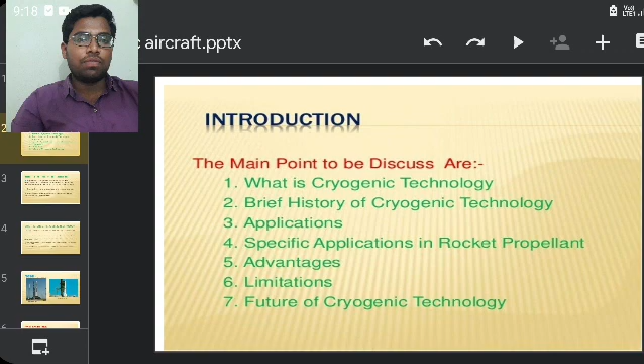What is cryogenic technology? In physics, cryogenics is the study of the production and behavior of materials at very low temperature, below minus 150 degrees and minus 238 degrees Fahrenheit or 123 Kelvin. The study of how to produce low temperatures. The study of what happens to materials when you have cooled them down.

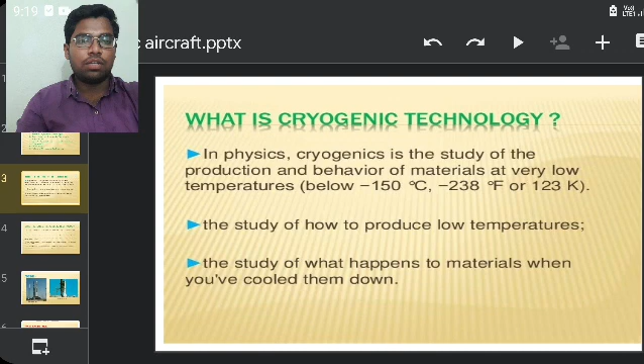Brief history of cryogenic technology. The field of cryogenics advanced during World War II when scientists found that metals frozen to low temperatures showed more resistance to wear. The United States was the first country to develop cryogenic rocket engines, with the RL-10 engine registering its first successful flight in 1963, and it is still used on the Atlas V rocket.

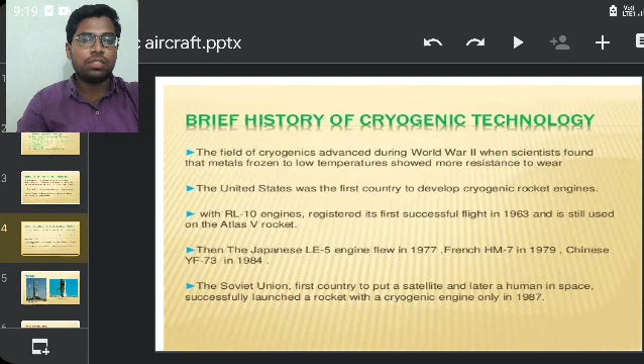Then the Japanese LE-5 engine flew in 1977, French HM-7 in 1979 and Chinese YF-73 in 1984. The Soviet Union, first country to put a satellite and later a human in space, successfully launched a rocket with a cryogenic engine only in 1987. Continued. These are some photos of rockets, Russian N1 on the right and American Atlas V on the left, which are used by cryogenic engines.

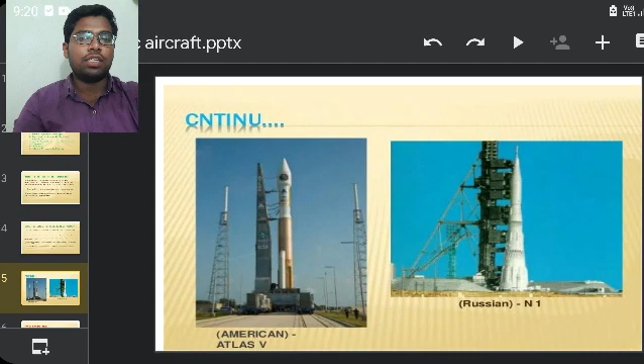What about India, our country? Right now, India has got great success in this technology, but during 1991 to 92, India faced many problems to get the cryogenic engine from Russia. The US, Japan, and France did not agree to provide the technology to India, or did so only at an exorbitant price, means high price. The deal violated the Missile Technology Control Regime, which was intended to prevent the spread of missile related technology, and fell foul of US laws meant to enforce its provisions.

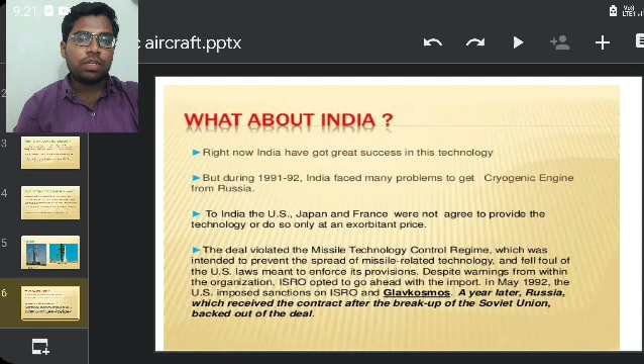Despite warnings from within the organization, ISRO opted to go ahead with the import. In May 1992, the US imposed sanctions on ISRO and Glavkosmos. A year later, Russia, which received the contract after the breakup of the Soviet Union, backed out of the deal. ISRO then had no option but to develop the technology on its own. At the time, ISRO gave the impression that much of the technology had already been acquired and the development would be quick. Since then, India took it as a challenge to develop its own technology.

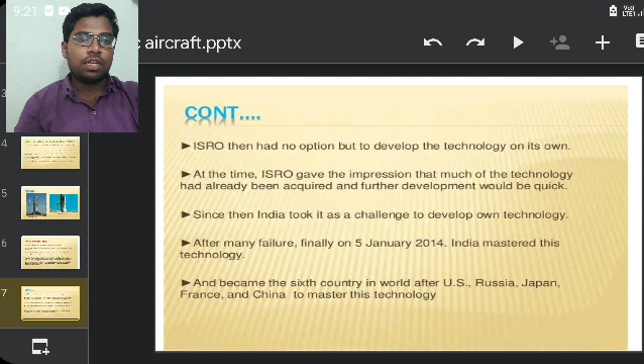After many failures, finally on 5th January 2014, India mastered this technology and became the sixth country in the world after US, Russia, Japan, France, and China to master this technology. Applications. These are used in rocket engines, electric power transmission in big cities, frozen food and blood banking, infrared sensors, electronics, and X-rays.

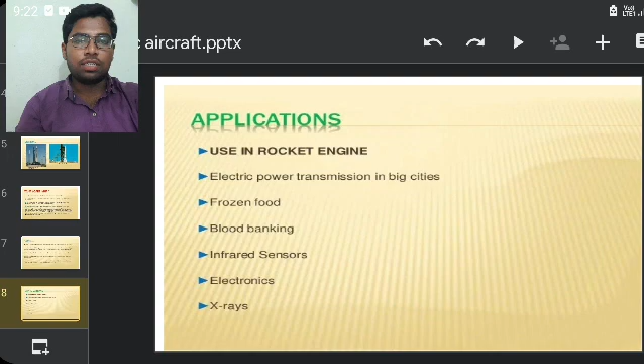Used in rocket engine, which is our main topic. A cryogenic rocket engine is a rocket engine that uses a cryogenic fuel or oxidizer, that is, its fuel or oxidizer or both are gases liquefied and stored at very low temperatures. During World War II, when powerful rocket engines were first considered by German, American, and Soviet engineers independently, all discovered that rocket engines need a high mass flow rate of both oxidizer and fuel to generate sufficient thrust.

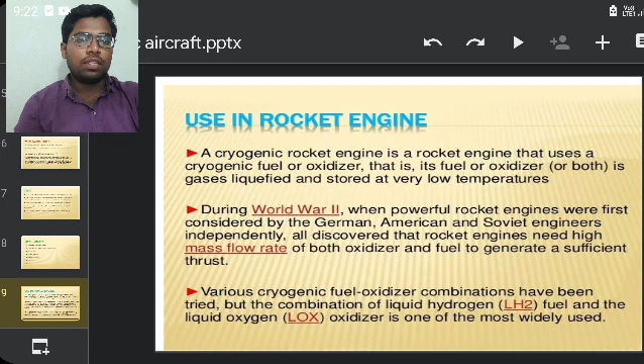Various cryogenic fuel oxidizer combinations have been tried, but the combination of liquid hydrogen (LH2) fuel and liquid oxygen (LOX) oxidizer is one of the most widely used. First operational cryogenic engine, the RL-10 cryogenic rocket. You can see it in the picture.

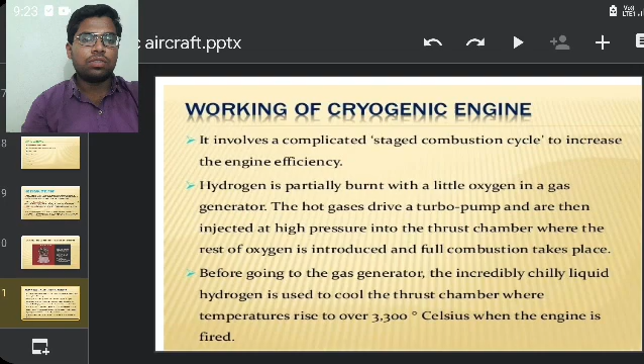Working of cryogenic engine. It involves a complicated staged combustion cycle to increase the engine efficiency. Hydrogen is partially burnt with a little oxygen in a gas generator. The hot gases drive a turbo pump and are then injected at high pressure into the thrust chamber, where the rest of the oxygen is introduced and full combustion takes place. Before going to the gas generator, the incredibly chilly liquid hydrogen is used to cool the thrust chamber, where temperature rises to over 3300 degrees Celsius when the engines are fired.

Advantages of the cryogenic engine. High energy per unit mass. Propellants like oxygen and hydrogen in liquid form give a very high amount of energy per unit mass, due to which the amount of fuel to be carried aboard the rockets decreases. Clean fuels. Hydrogen and oxygen are extremely clean fuels. When they combine, they give out only water. This water is thrown out of the nozzle in the form of very hot vapor. Thus, the rocket is nothing but a high burning steam engine. It is economical. Use of oxygen and hydrogen as fuels is very economical, as liquid oxygen costs less than gasoline.

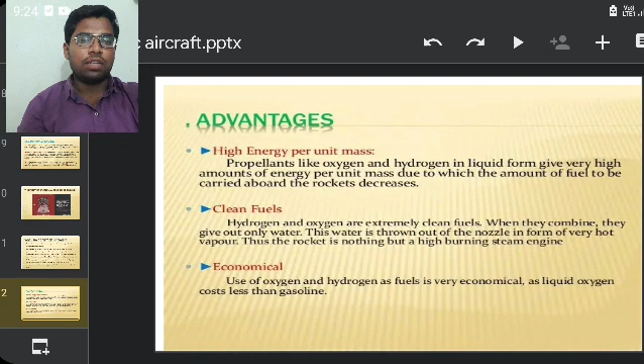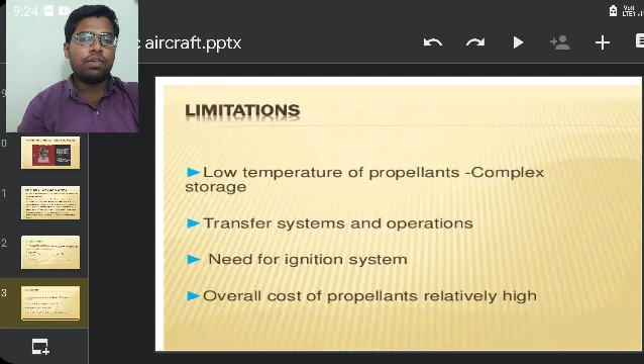Limitations of the cryogenic engine. Low temperature of propellants, complex storage, transfer systems and operations. Need of ignition system. Overall cost of propellants is relatively high. Highly reactive gases. Cryogens are highly concentrated gases and have a very high reactivity. Liquid oxygen, which is used as an oxidizer, combines with most organic materials to form explosive compounds. So, lots of care must be taken to ensure safety.

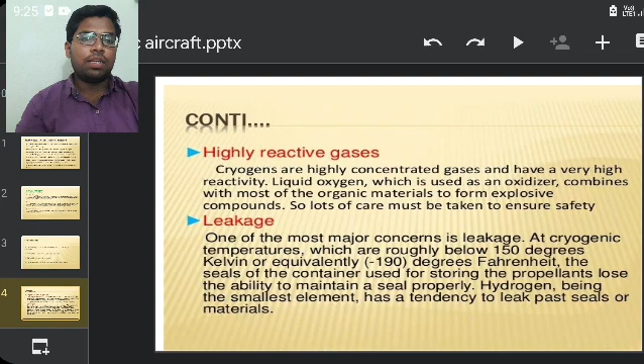Leakage. One of the major concerns is leakage. At cryogenic temperatures, which are roughly below 150 degrees Kelvin, or equivalently minus 190 degrees Fahrenheit, the seals of the containers used for storing the propellants lose the ability to maintain a seal properly. Hydrogen, being the smallest element, has a tendency to leak past seals or materials easily.

The next generation in rocket engines. All rocket engines burn their fuel to generate thrust. If any other engine can generate enough thrust, that can also be used as a rocket engine. There are a lot of plans for new engines that NASA scientists are still working on. One of them is the xenon ion engine. These engines accelerate ions or atomic particles to extremely high speeds to create thrust more efficiently. NASA's Deep Space One spacecraft will be the first to use ion engines for propulsion.